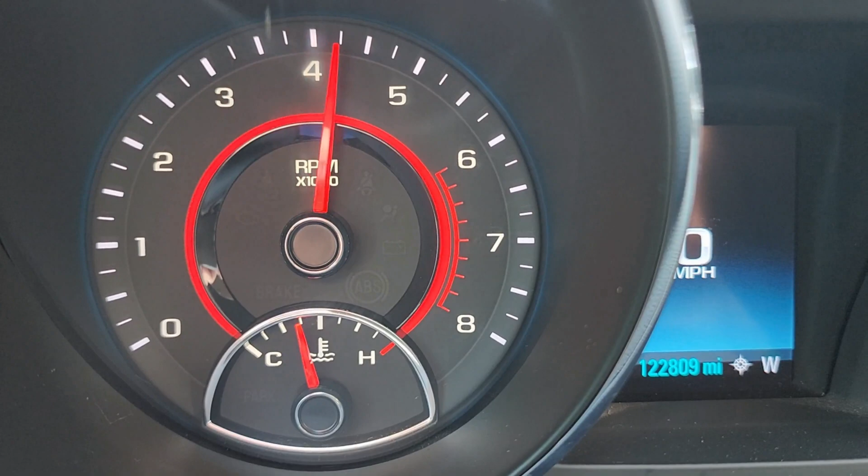Let's talk about knock today. This is going to be a two-part series. Part one, which we're dealing with today, is really going to get into the physics and chemistry of things. If you feel like you already know everything, you could probably skip this, but I still think there's some important stuff to be learned and discussed. Part two, we'll be digging into HP Tuners and talking about all the mechanisms GM has put into the calibration file to handle knock.

So what is knock? Well, knock is actually the result of detonation. Detonation is basically, I don't want to say spontaneous combustion of fuel, because it's not spontaneous, there's real causes for that. But it's really about the immediate or unexpected detonation of all of the fuel all at once.

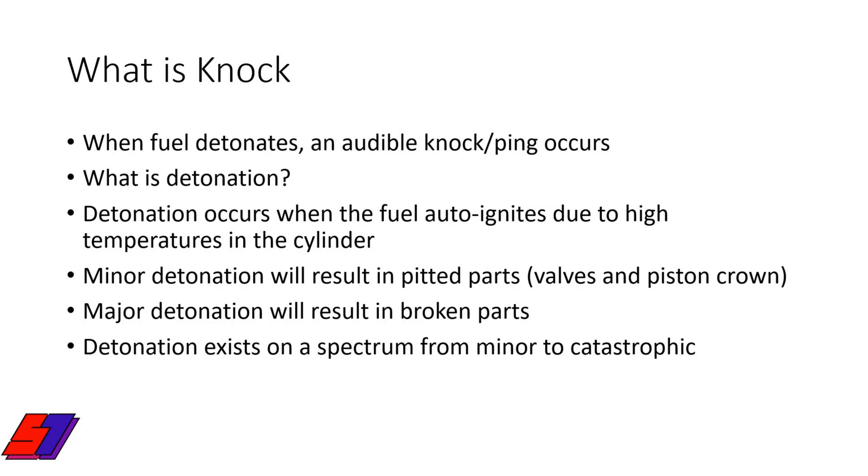Detonation occurs on a spectrum. There's mild detonation and major detonation. In general, most engines can tolerate a little bit of detonation. You will see a little pitting on the engine parts, that's your clue you have some problems. And if it's catastrophic enough or a big enough detonation, it's going to blow things apart, resulting in broken metal.

Pre-ignition is also used in the same breath as knock or detonation, but these are very different things. Detonation happens after the spark plug has initiated combustion. Pre-ignition, well, 'pre' should tell you, hey, we have the combustion of the fuel before the spark plug ever fires.

I don't exactly know what kind of sound is associated with pre-ignition, and the fact is, pre-ignition does not exist on a spectrum. It's pretty much either you have an intact engine or you have a pile of junk on your hands. Its effect is typically very immediate. So pre-ignition is way worse than detonation. Because the pressures are so high and the temperatures are so hot, it doesn't break parts, it melts the parts. You will have a hole in your piston. Either way, we don't have a way to deal with pre-ignition, so we want to avoid that.

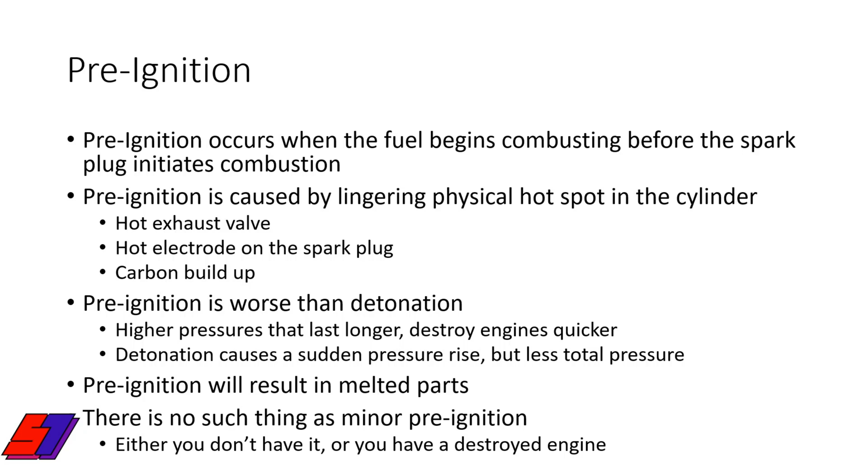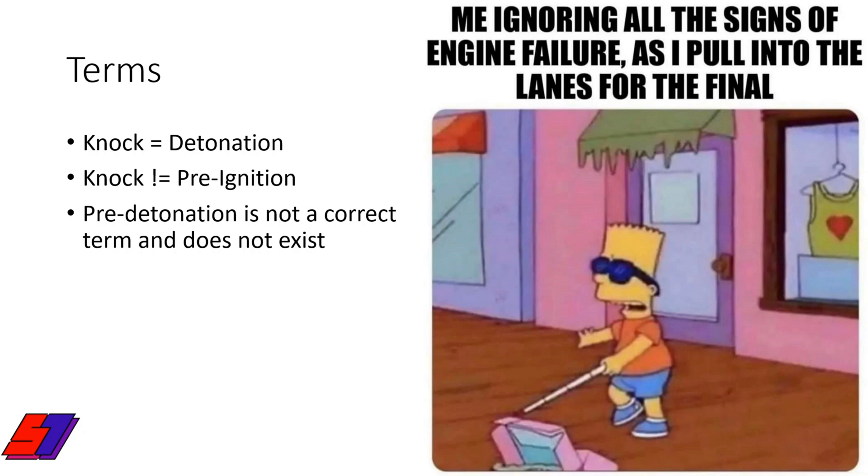But we do have a way of dealing with knock, so let's talk about this. Knock is typically detonation, they're used interchangeably, although detonation causes an audible knock or a ping. But knock is not pre-ignition. Also, the term 'pre-detonation' is not a technically accurate term, and you should not use that in your vocabulary.

So cause and effect, in terms of knock: the pressure inside the cylinder or combustion chamber—I'll just say cylinder, but understand I mean a combination of cylinder and combustion chamber—the pressure rises, which causes temperature to increase, and if that temperature gets high enough, it will detonate the fuel, and then you get that knock sound.

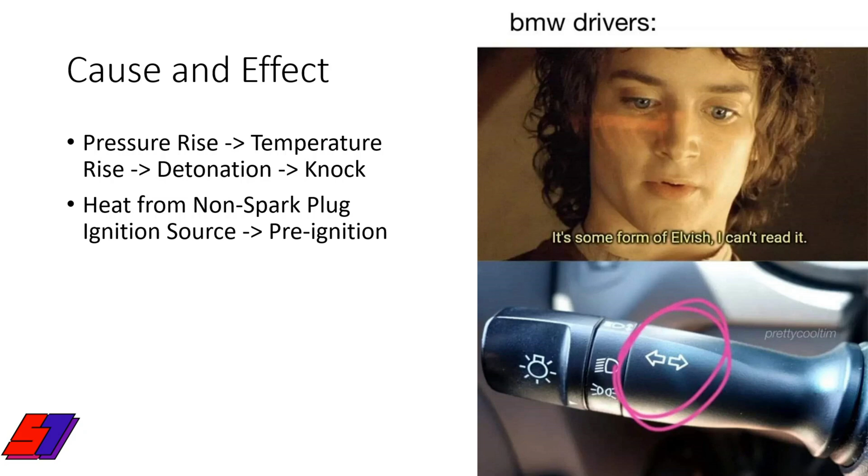Pre-ignition, though, is much simpler. It just means we have a physical hotspot. As soon as the fuel touches it, well before the spark plug pops, it's going to start burning the fuel, and just a runaway combustion of all the fuel.

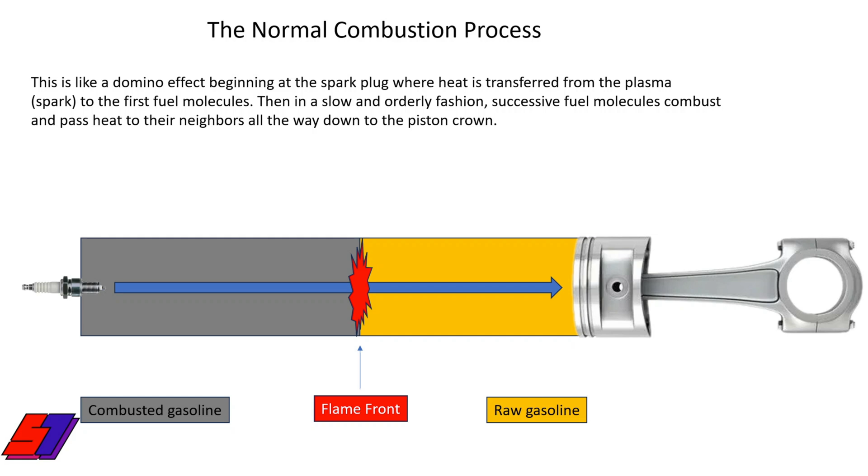So the normal combustion process, in this very highly detailed, amazing graphic here, is slow and controlled. Spark plug sparks, and the fuel starts burning in a very orderly fashion. Just like when you set up dominoes, you hit the first one and they all fall down. It's a chain reaction—slow, controlled, predictable. We know what's going on.

However, in the detonation cycle, which we want to avoid, it's similar at the beginning, meaning we have a slow, orderly, controlled combustion of the fuel, but that's also simultaneously increasing cylinder pressure on top of the piston coming up and compressing it. And when that happens, the surrounding air or remaining air inside the cylinder gets hot.

Now you can see we potentially have a separate source of combustion over here. This guy has popped, and now we can see it's starting to send out its flame front this way. What happens when detonation—or knock, I should say, the audible knock sound—is when these two flame fronts collide. Just like when you're looking at a weather map and the weatherman shows you hot and cold fronts, when they touch, that's where you get tornadoes or crazy weather patterns and systems.

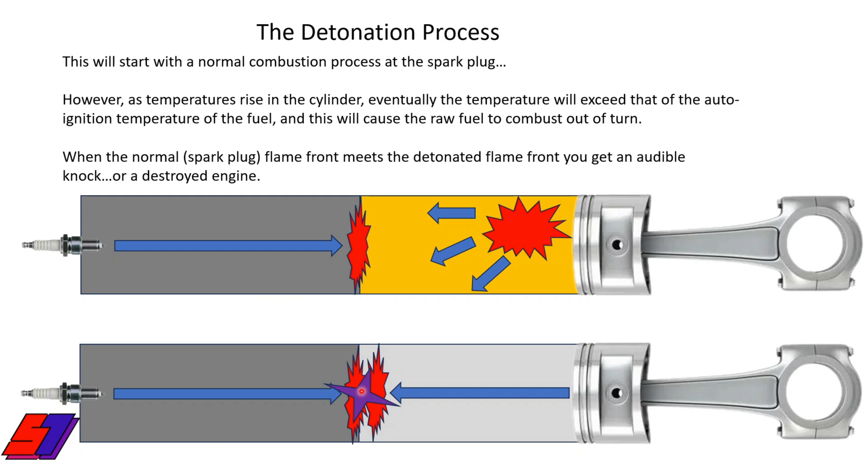So same thing for knock: those two flame fronts hit and collide and make a knock, and then, big bada boom. All right, so pre-ignition again, the causes of that: an overhanging head gasket, creating a little thin piece of sheet metal.

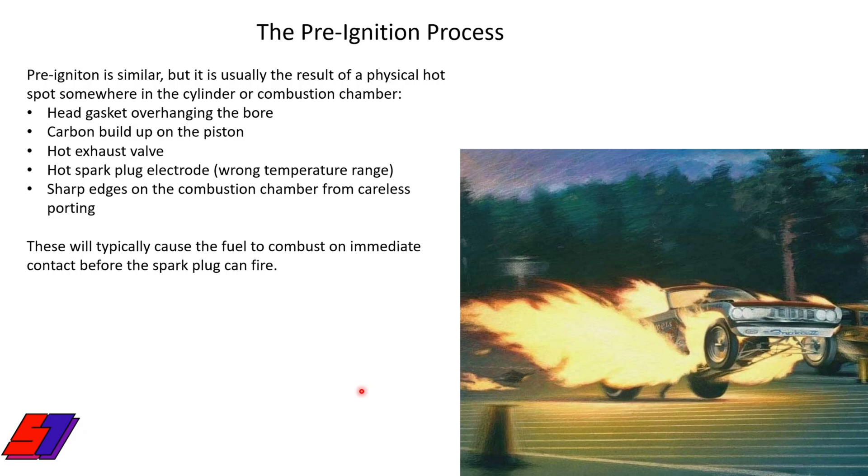If you have an MLS gasket in the bore, you want to avoid that. Carbon buildup, a hot exhaust valve, an overheated spark plug electrode, any sharp edges - if you've had your heads milled or stuff taken out of the combustion chamber, there may be a sharp edge, and that's a good reason to soften it, because those thin areas are what get hot and retain heat. Just another general graphic I found on the web after I'd made my own, but it shows the same thing.

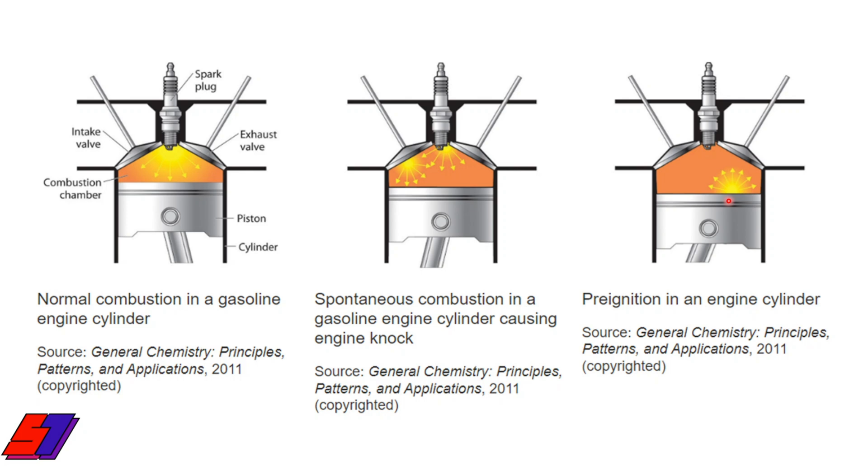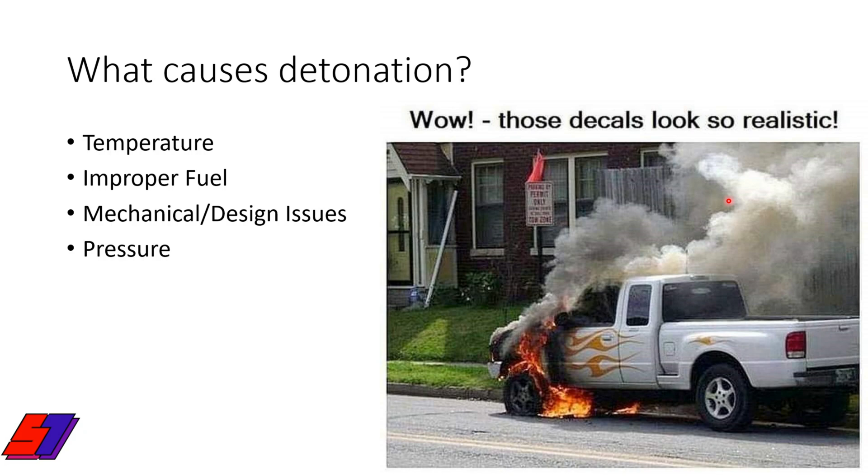Okay, so let's talk about some causes. In general: temperature, fueling, mechanical design issues, or just high cylinder pressure.

So anything that you can do to reduce temperatures - high IATs, maybe get a better cold air intake to reduce them. High coolant temp - maybe your radiator's plugged up with bugs and leaves. Obviously boost is going to increase temperature a lot, so you want to take care of that with a proper intercooler.

And the other thing is a lean AFR, and this is kind of two things. The obvious one is liquid fuel does a lot to cool - that's the latent heat of vaporization. When you get out of a hot shower into the air, your skin feels cold, that's water evaporating. Same thing happens with gasoline - gasoline has a much higher latent heat of vaporization. If you took a shower in gasoline, which I would not recommend, you'd feel even colder when you got out compared to water. And even more so for an ethanol shower - again, do not take an ethanol shower - but you'd feel even colder than gasoline.

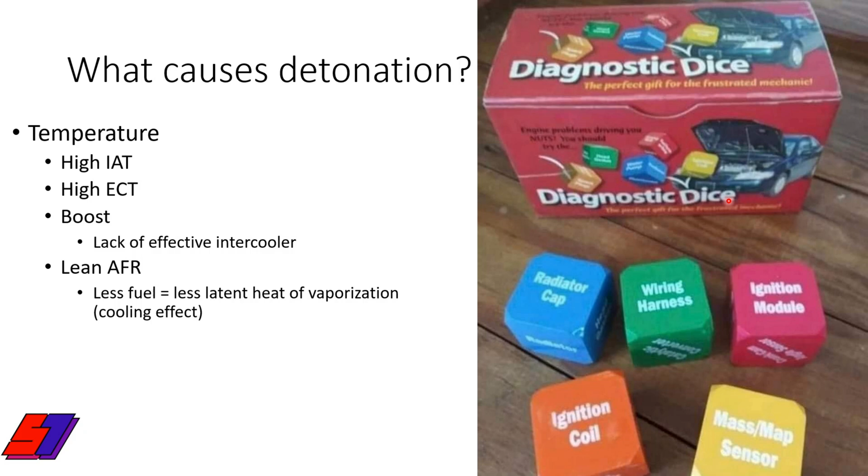So when you lean out the air fuel ratio, you're losing some of your cooling capacity. Also, the other double whammy for a lean AFR is that lean air fuel ratios are much harder to initiate and promote combustion - in other words, misfire. And when you have a misfire, you have unburned fuel sitting in that cylinder with nothing to do. Now, it's a lot harder to spontaneously combust exhaust gases than raw fuel, so if you cannot burn the fuel, your chances of a knock or detonation event are higher. You cannot detonate already-combusted exhaust gases.

So obviously we all know about octane, we'll talk more about that. Low octane could be a problem - a bad batch of fuel, since fuel is man-made and manufactured. Maybe the guy driving the tanker truck accidentally put the wrong hose to the wrong tank, and the premium fuel's got the low octane stuff in it. Who knows? But also, in general, understand that octane is not power.

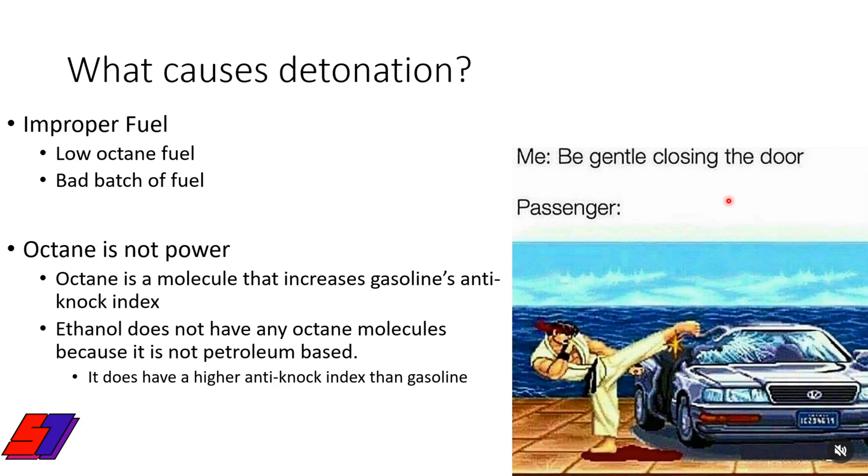A lot of newbies think, oh, if I put premium fuel in my car I'll make more horsepower or get better gas mileage, and that is not the case. Octane is just a molecule and it has an anti-knock index - we'll talk about that in a little bit. Ethanol does not have any octane molecules, but it's rated on the same octane, or anti-knock index, scale that gasoline is.

So other issues that can cause detonation: mechanical or design issues - too high a dynamic compression ratio, a lack of squish and quench, misfire, and oil. We'll get to that in a bit, but understand the refining of crude oil removes a molecule called heptane. Heptane is the exact opposite of isooctane - isooctane as a molecule is 100 on the octane scale, so good. Heptane is 0 on the octane scale. Refining of crude oil removes heptane - doesn't necessarily add octane, but it changes the ratio of heptane to isooctane molecules.

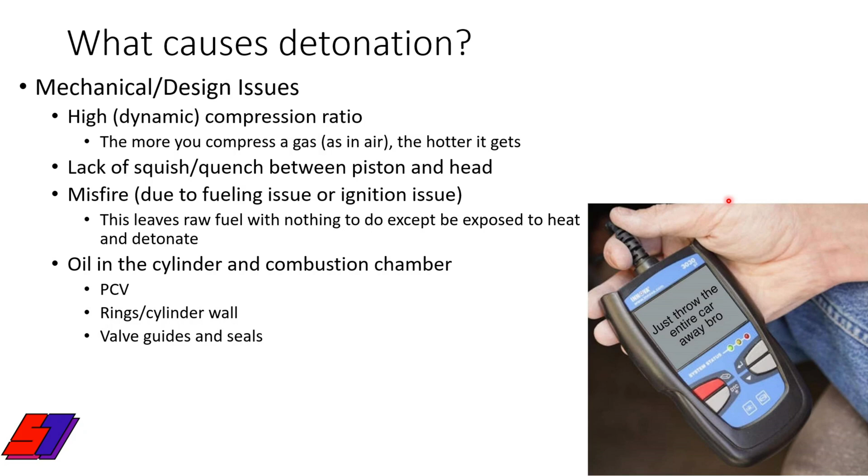So where do you think engine oil fits on that spectrum of highly refined fuels from oil? It's not refined hardly at all in comparison. So when you get oil into your cylinder, you're effectively reducing the octane rating, or anti-knock index, of that fuel. Run a catch can for positive crankcase ventilation - that's half the battle. You also need a fresh air oil separator to deal with the clean side during reversion events - those are the obvious things. Now there's also engine wear in general, as far as rings, cylinder wall, and valve guides leaking oil in there - you're not going to be able to just buy a part to fix that. So obviously, oil is bad - don't want that inside your combustion chamber at all.

The only thing I didn't mention is that when you burn oil, it creates a lot of carbon buildup, which is going to coat and build up on oxygen sensors and catalytic converters, reducing their effectiveness, which you don't want, and plugging things up potentially in the catalytic converter as well. So there's no good argument for burning oil, and that carbon that stays in is just going to score your rings and cylinder walls too. Oil is bad.

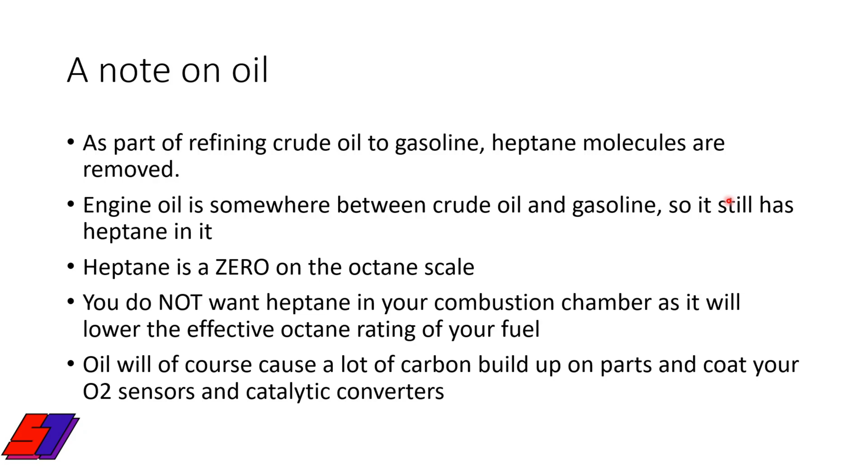Okay, so in general, get the best catch can you can afford and get a fresh air oil separator. There is a link here.

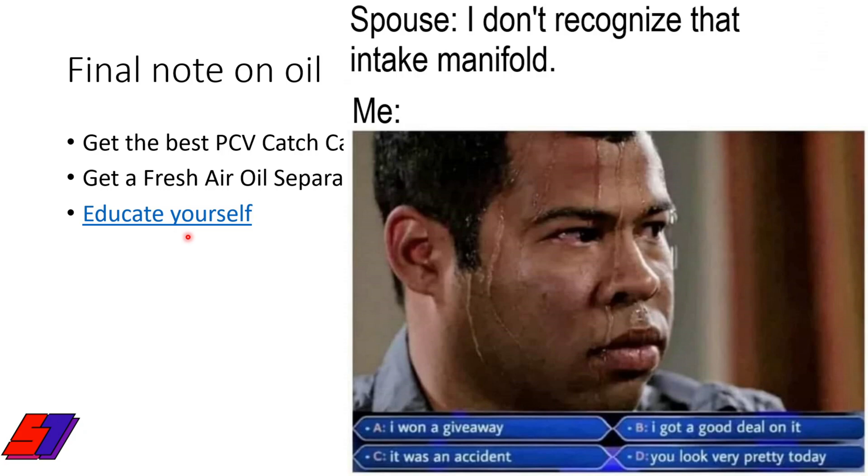So other issues is pressure. Obviously, too much boost, and then obviously, if you're running boost, that also increases IATs. So that's like a double whammy as well.

Most likely, though, the reason you're here is to talk about too much ignition advance. So when you advance the ignition, you start the combustion process sooner. That fuel is burning, which generates heat, and creates expanding gases, which generate more pressure. At the same time, the piston is traveling up, compressing everything else in the cylinder, which also creates more heat.

And by the way, when you compress a gas and it gets hot, that's called adiabatic temperature rise, adiabatic. I've heard it pronounced different ways, but I think adiabatic is the proper way to say that. But that's how your air conditioner works, right? It compresses a gas, it gets hot, then you cool it while it's compressed, and then you let it expand and it gets even colder.

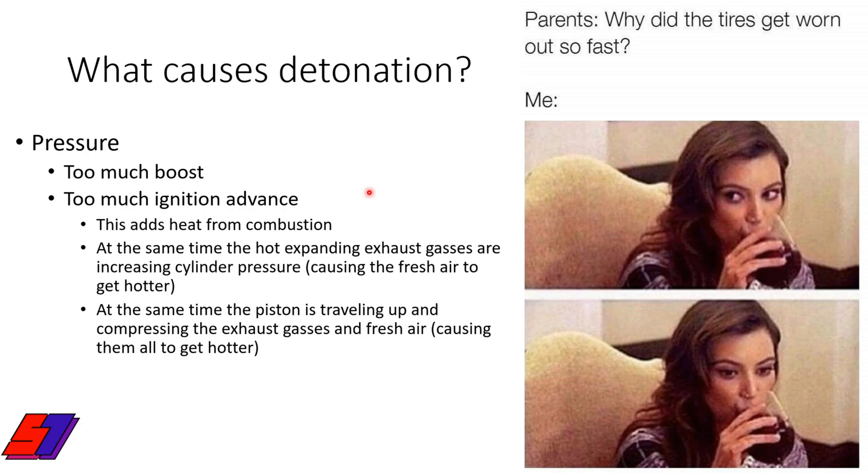So the same thing's going on inside your piston or your cylinder. Push up, piston goes up to compress the air, it gets hot. So we'll deal with the tuning for this ignition advance in part two.

So in general, anything you can do to reduce the temps, including artificial means, water methanol injection. World War II fighter jets used this. Pretty cool. Like the P-51 Mustang was supercharged. And by doing a water injection, they later added methanol to prevent the water from freezing at cold temperatures, but it almost doubled the horsepower output.

Pretty sweet. There's also fuel additives, boost juice, or just the generic octane booster as well.

Aluminum cylinder heads, also a big win. I would imagine all the LS guys are probably already running aluminum heads, but you have an old school Gen 1 small block Chevy with iron heads. Just understand that aluminum is a much better conductor of heat and therefore is able to wick away high temps from the combustion chamber into the cooling system. Aluminum does that way better than iron. So iron is pretty bad, right? So it kind of rejects the heat. So aluminum will keep things cool and it will allow you to run more boost and more timing without detonation.

Indexing spark plugs. This is kind of a controversial thing. I'm not necessarily suggesting that you do this for power or for anything else, but there's always a possibility, depending on the design of your combustion chamber. The hottest valve between the intake and exhaust is obviously the exhaust valve. The intake valve is cooled with fresh air and fuel, but the exhaust valve typically is dealing with the fuel still most likely burning as it passes by it and it gets really hot. So, where do you think a good place is that raw fuel will be sitting waiting to be detonated at a high risk zone? That's going to be right at the exhaust valve. So, if you can bias the spark plug electrode to maybe initiate combustion and start the flame front at the exhaust valve, and then you can basically eliminate any raw fuel from there, well, then perhaps maybe you can stave off detonation. I don't know that it's actually going to work, but maybe if you've exhausted all other options, that may be something.

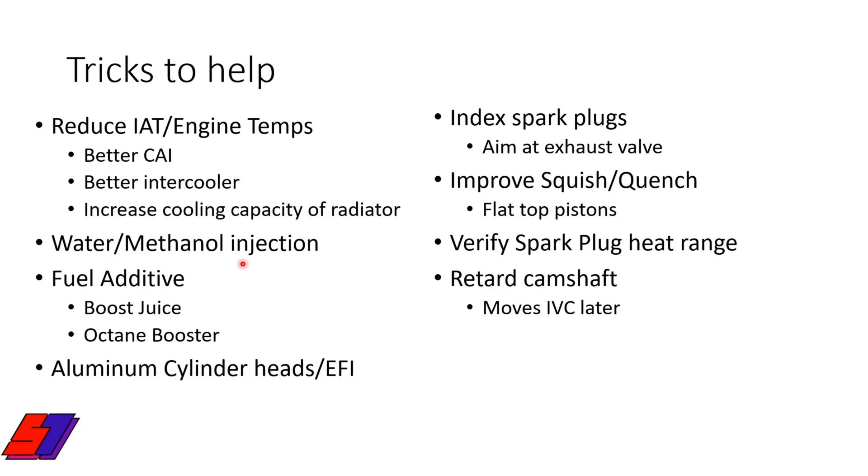Improving squish and quench using flat top pistons means getting that piston as close to the quench pad on the cylinder head as possible without hitting it. Spark plug heat range is important too, so make sure you're using the correct heat range. And if all else fails, you could retard the camshaft. That moves the intake valve closing angle later in the compression stroke, reducing your dynamic compression ratio. They do make adjustable timing sets, so you can change the relationship of the cam to the crankshaft.

Now let's look at some auto ignition temperatures of molecules often used as additives in gasoline. First there's octane, but that's not the same as isooctane, which is what we're interested in. Heptane is very low at 223, compared to isooctane at 396. Your grandpappy probably ran fuel with tetraethyl lead in it, and look at that, super high auto ignition temperature. That's why they used it on those old crappy fuels before ethanol based fuels. It was plentiful, cheap, and did a great job.

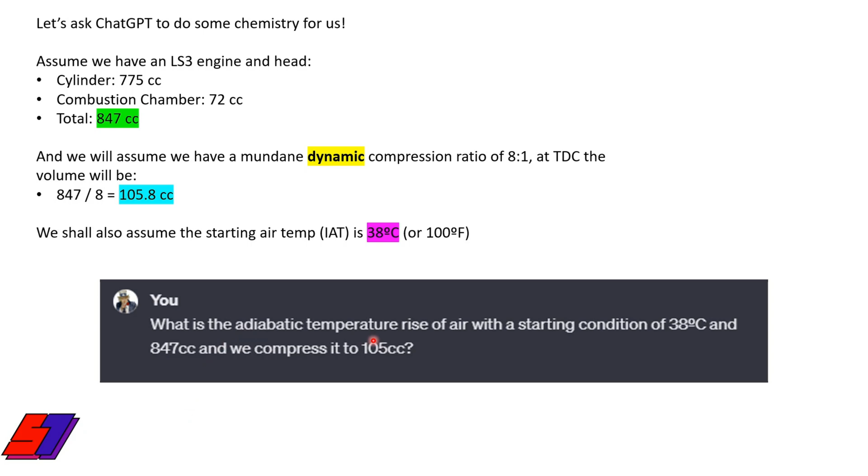Let's do a little science experiment. We'll have ChatGPT do our bidding, starting with an LS3 setup. The total volume between the cylinder and combustion chamber is 847 cc's. When the piston goes to top dead center, assuming a dynamic compression ratio of 8:1, it's 105.8 cc's. We'll say the IAT is 38 degrees centigrade, or 100 on a Fahrenheit scale. So if the piston goes up and compresses that air, what temperature will the air be? This is the adiabatic temperature rise. Here's the answer: basically 441 degrees Celsius.

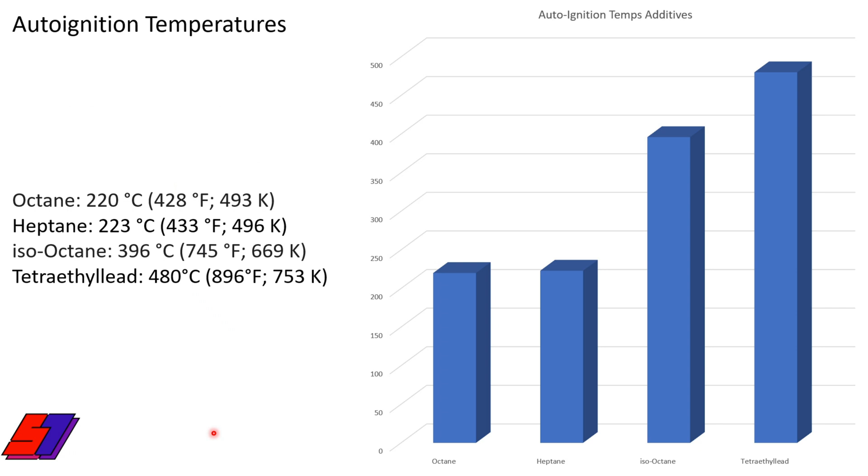441 is higher than isooctane and certainly higher than gasoline. This is a simplistic view though - there's a lot more going on, including the cooling system. As the piston goes up to compress and creates temperatures, a lot of that heat is getting absorbed into the cooling system, and there are other factors too. But the point is, you can see there's substantial temperature rise when that piston compresses the fuel.

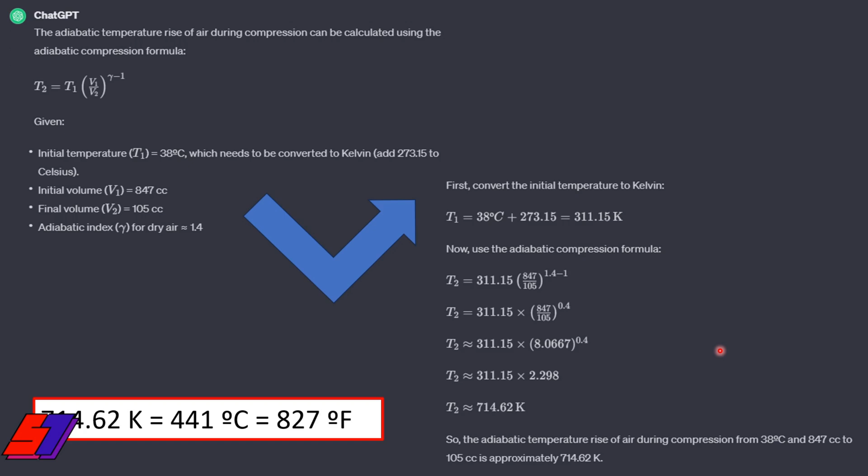One other quick note for those of you viewing in Australia or the UK - a lot of times I see people posting online about how their country has much better fuel than the United States just because their octane numbers are much higher. That's a bunch of rubbish. Thing is, the USA uses an average of the motor octane number and the research octane number, MON and RON, or M and R for short. The motor octane number goes onto a specialized machine that induces knock to see how much pressure the fuel can withstand. The research octane number is much more math and chemistry based. We average the empirical motor octane number versus the research octane number to get a more realistic viewpoint. All gasoline pumps in the United States say R plus M divided by 2. When you go to Australia, you'll see 98 octane fuel, but that's just the research octane number. So 98 in Australia is the same as 93 in the United States - they're just rated differently.